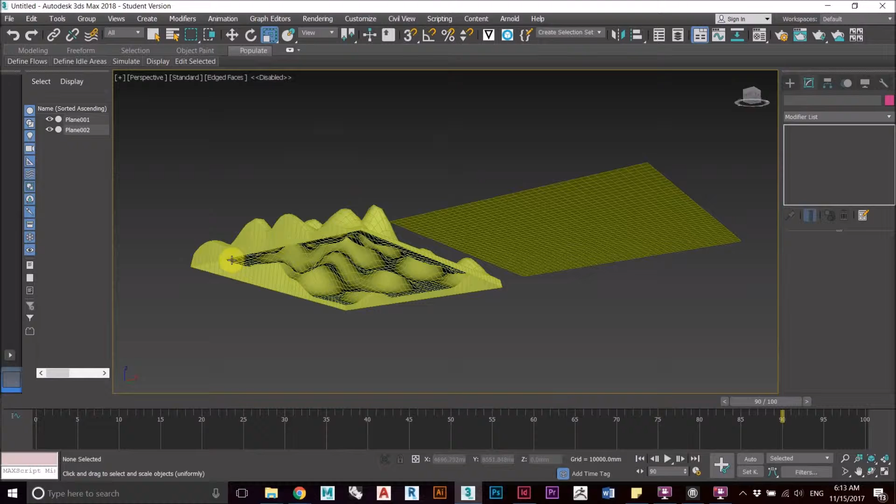Hello. This video is about how to create a terrain that is ready for 3D print with the minimum material. This is the intended shape that we want to get: a thin shell of 2 mm thickness, which is the minimum thickness for 3D print, with a flat base.

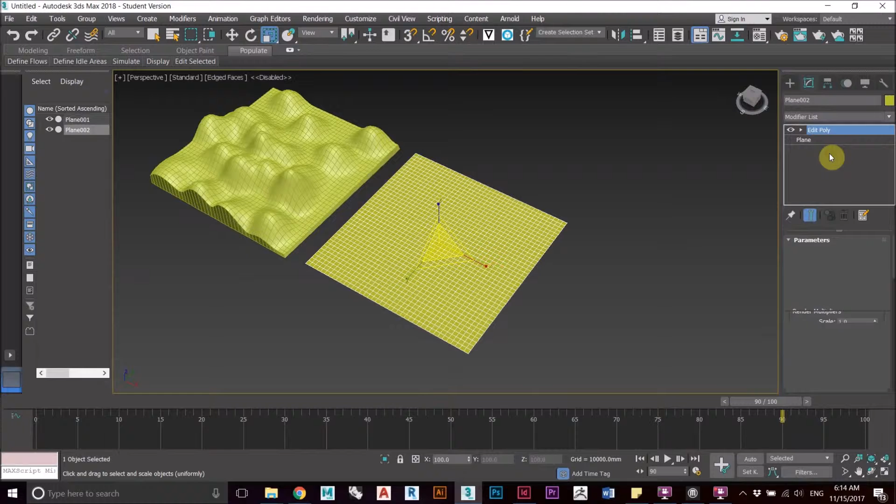So this is what we want to achieve. Let's start off with a plane that we created, set the segments to around 40 or more, and then apply an edit poly onto it. Then go into vertex mode with the shortcut key 1, and turn on soft selection.

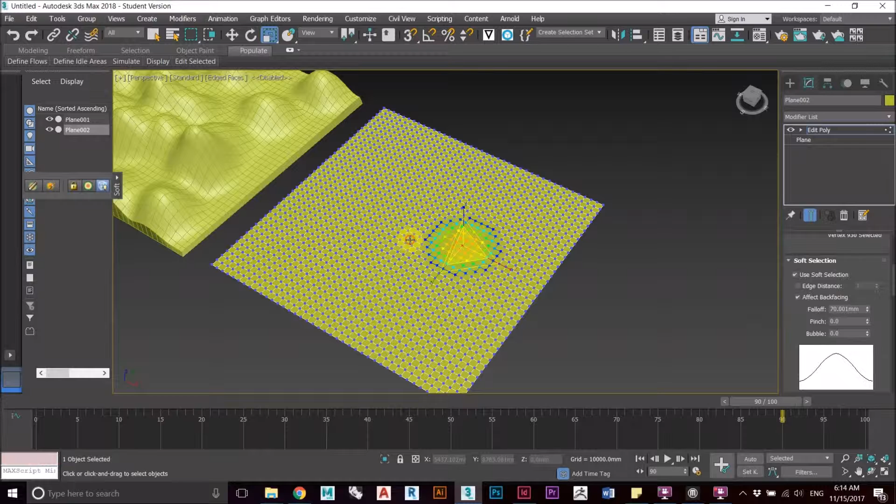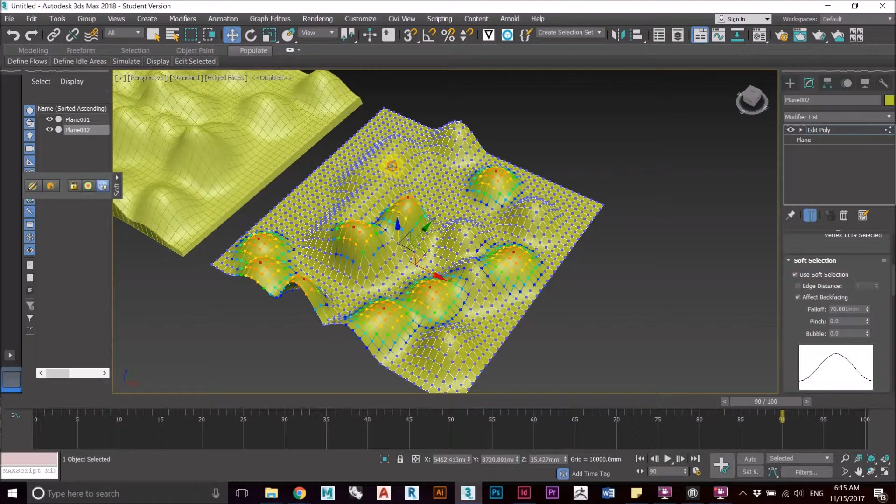Select the area that you want to have some height, and with the shortcut key W, you can move it upward. Then we can select other areas on the side to give it a bit more depth. So we can see this is what we can do, and then you can do it to the side as well.

Just really play around with whatever terrain that you like. Great, and there we have it, the general form.

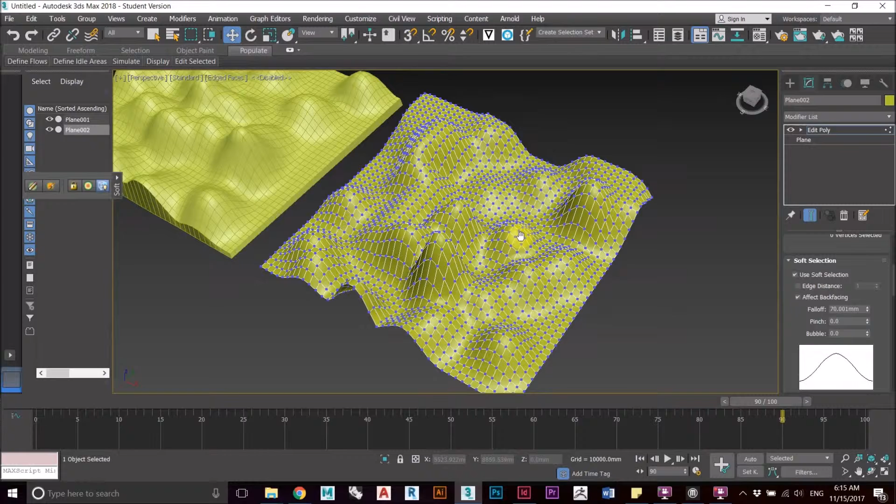The soft selection could be turned off because we don't need it anymore. Then we can go into border mode and select the outer border. Then we can extrude that and move it down.

What we want is a flat base, because this is not yet flat — it's only an extruded surface. So we go down to this roll-down menu and go into Make Planar. And there we go, now we have this flat base.

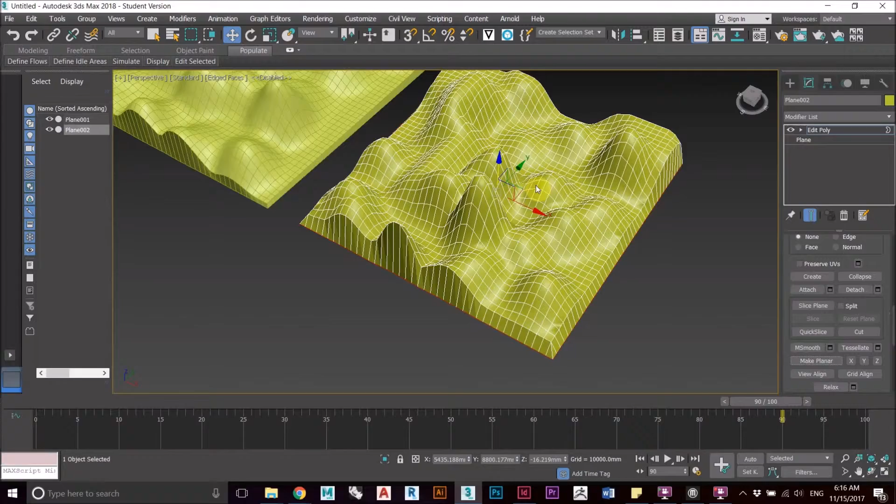This is now only a surface, so what we want to do is add thickness to it. We need a Shell modifier — it gives a thickness, with an amount set to 2 mm, which would be the minimum for 3D print. And there we have it.

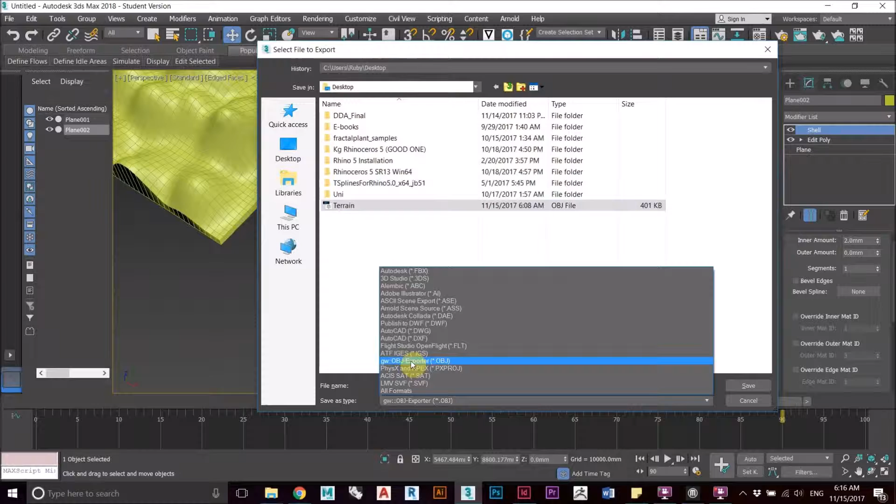Then we can export this out. Go to File, Export Selected, and we can save it as an OBJ file. Then save, export, and done.

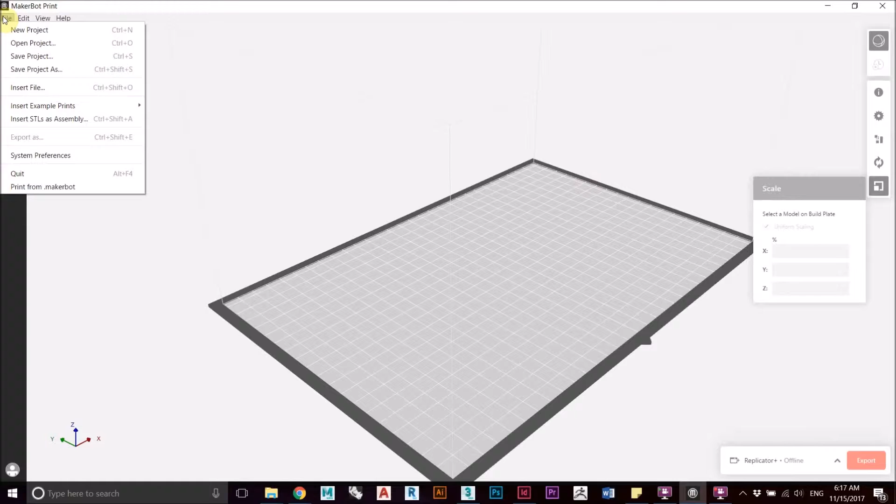After exporting, we can use another software called MakerBot Print to check our file and position it for submission to 3D print. Go to File and Insert File — it actually reads all kinds of file types, like STL, IGES, and also OBJ. So let's import an OBJ.

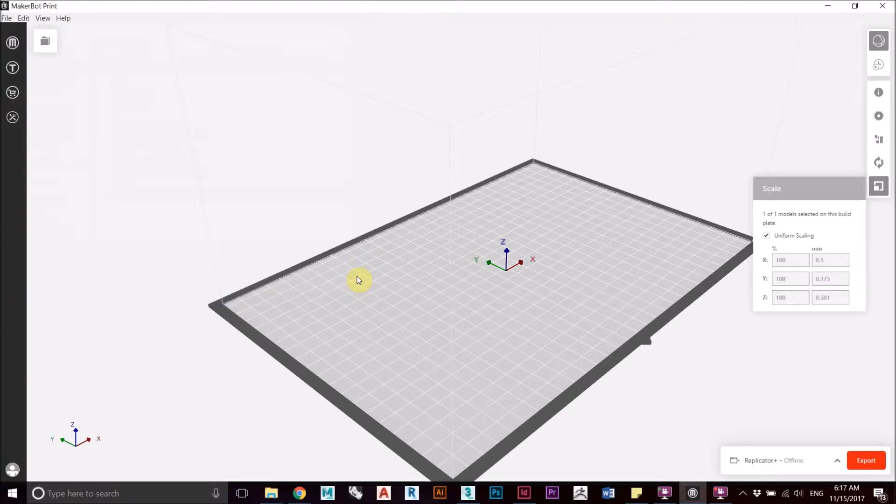And okay, there we have it. Maybe it's a bit too small right now, so we're just going to scale it up a bit — let's go to 2000. Then we can rotate it to this.

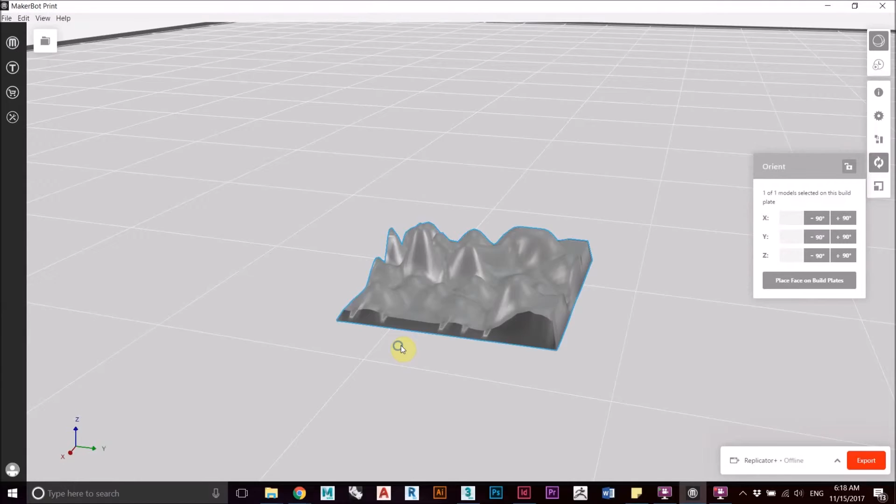There doesn't seem to be any problem with the file, but if you see any errors or transparent materials, there's actually a website you could use to fix your files — NetFabb online. Just sign in with your Google account, upload your 3D model with the error, and it will automatically fix your file and allow you to download a fixed file that's ready for 3D print.

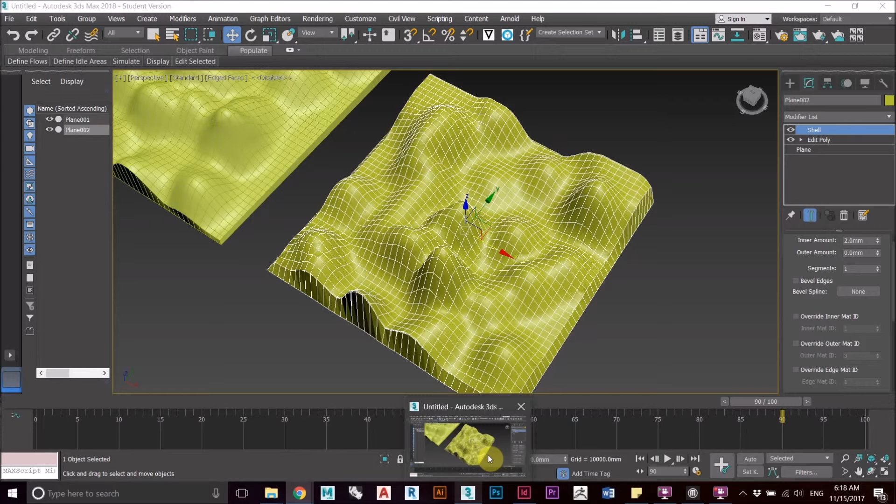Basically this would be the method for a quick and easy way to 3D print a terrain with a minimum of materials, so students have to pay less, which is the very best thing. Thank you for watching, and happy all.